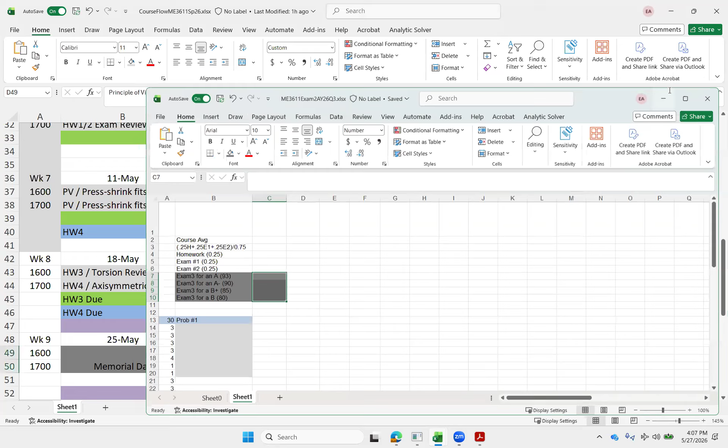Alright, let's jump on over to our 6.3 slide set. Where we left off was we had gone through and looked at all the different individual deflections from what we know about axial and beam bending. And we were able to see that they did add up to the same thing that our Castigliano method gave us. So we got pretty high confidence in that now.

We also said that if we needed to find out something that we didn't have, we could add a load on there called a dummy load. So we're just going to formalize the steps for that. For our dummy load method, we want to determine the displacement or rotation anywhere along the structure if we don't have an applied load.

Let's say we've got an end load, but for some reason I want to know the deflection and or the rotation at the middle. Maybe there's an issue where with a certain amount of deflection, we could have interference or contact with another part. We just place a load on there. Could be a force or a moment.

We can choose the direction as desired. If we're fairly clever, we can guess which way to do it so that we get a positive answer for delta and theta. But if we guess it wrong, we'll just get a negative number. It'll tell us, hey, you should have drawn it the other way. All right, so no big deal there.

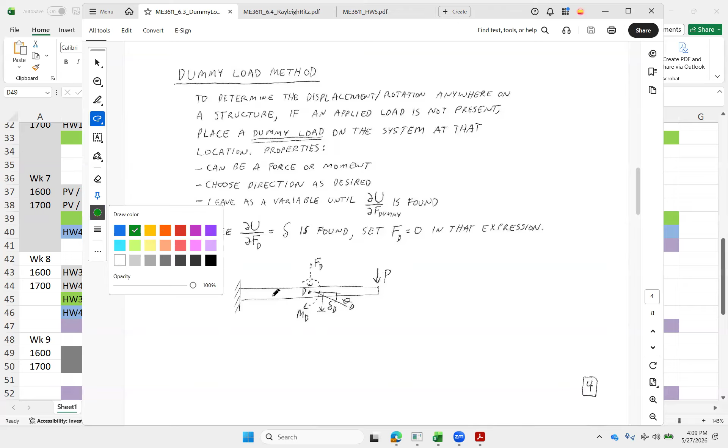We can reasonably know from our engineering intuition that this is going to deflect something like that. So if I want to know what the deflection is and the rotation, it's probably going to be going down and it's probably going to be rotating in this direction for theta and delta. So I might as well put my dummy loads on like that.

So you stick them on there, treat them just like any other load and formulate your energy. And then after we take our Castigliano, which is delta, partial energy, partial load, we'll set du d(dummy force) equals delta and du d(dummy moment) equals our theta that we're looking for. After we've done that derivative, then we go back and set the dummy load or loads to 0 in that expression. So there's our dummy load method.

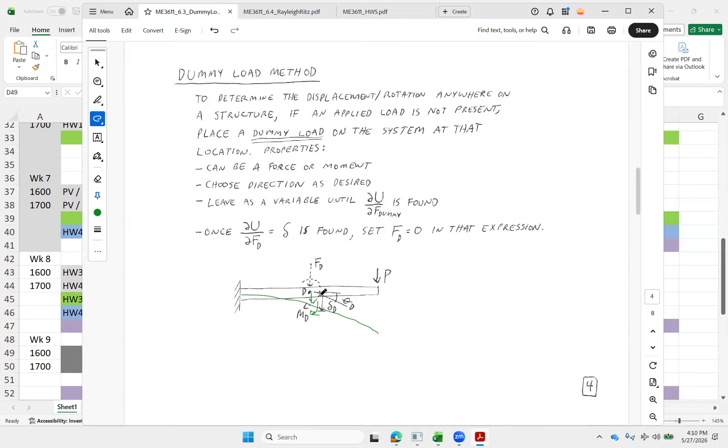All right, we treat it just like any other load, and then we zero it back out at the very end. Where the magic happens is when we get the real load and the dummy load combined in that m of x, when it squares, we FOIL it. And so even when we take derivative with this one, it'll be attached to some portion of the real load. And that's how we get our results. We were able to see those product terms come out also in this Castigliano when we were squaring for our moment in there. Let's take a look at a quick example here.

We're going to do a truss problem. So let us do one last free body review before we go to Rayleigh-Ritz method, where we won't use the free body diagram. So if you don't like free bodies, right after this will be the time to tune in. All right, let's take a look at this one. We've got a truss. It's a 3-4-5 triangle, so it's nice and easy to work with.

I labeled the nodes or the intersections B, C, D, and F, just so we avoid the Young's modulus that we're going to see in there. We've got a pin over at B. We've got a roller at point D. Dimensions are, again, make it a whole number triangle. We've got 4 on the height, 5 on the diagonal, and we've got an applied load at the top, P. Throw that applied load on there.

I'm just redrawing before we jump over. And what we'd like to find out is what's the deflection at that roller spot. All right, we know it doesn't move up or down, but it can slide over to the right. So we need a delta at spot D there. All right, we don't have a load there, so we don't have an easy energy method approach to get it, but we can throw one on there with no problem.

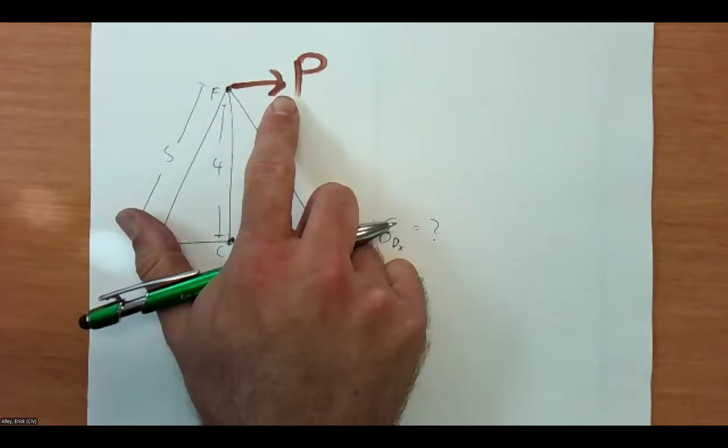So there's our applied load P. We want a deflection down here. So what I'm going to do is throw on a dummy load right here. We could call it F sub D or whatever we'd like, but some dummy load right there. And it's just going to sit right there. We're going to treat it like a load as far as the rest of the structure goes.

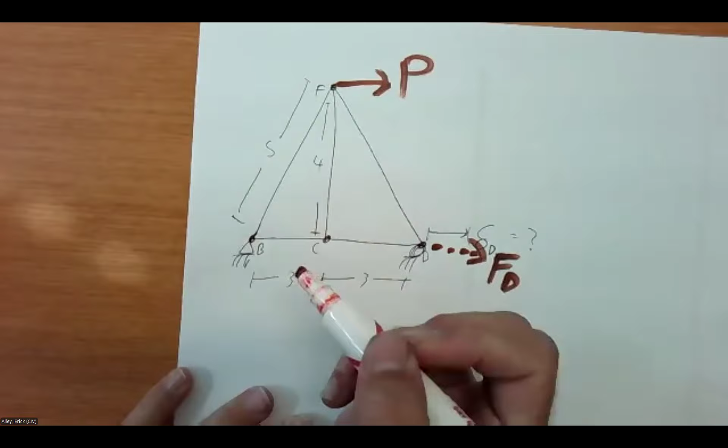All right, so now that we've got that one on there, I can figure out what my reactions are. Well, my reaction over here is the only place where I support an X force. So coming back this way, I'm going to have P plus all of that dummy force. That's the only reaction that we get in X, right?

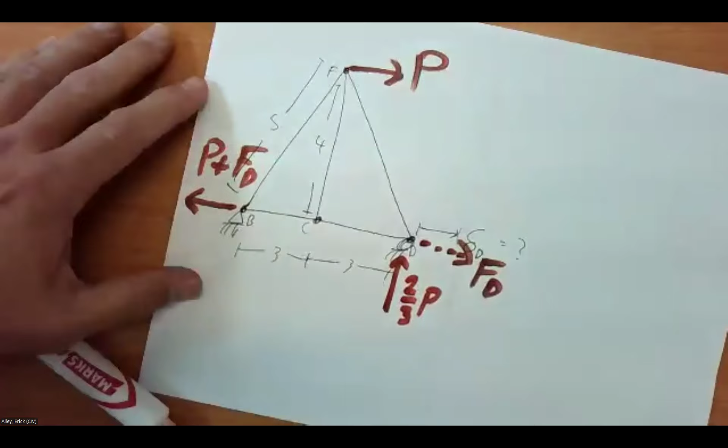If I want to grab the vertical reactions, I could do moments about B, let's say. So I've got P times 4 going clockwise, and I've got the reaction at D times 6 opposing it. All right, so what that's going to leave me with, if I do 2/3 of P here, 2/3 times 6, and then 1 times 4, those match up. All right, so if I sum moments around there, I get my reaction right there. And there's no vertical applied load. So if I'm going 2/3 P up here, then summation of forces, I just get 2/3 of P going down. So there's my reactions. There's my applied load.

Note that the dummy force didn't factor into these vertical reactions because it passes through where I was summing the moment, so we don't see that one at all. We'll only see it in the X reaction.

So here's our setup, and then we just need a few free bodies in order to grab everything that we need. We need the forces inside each bar, so let's do one free body at a time. Free body diagram at spot D first. For this, what we're going to want to do is just take a little slice around that corner.

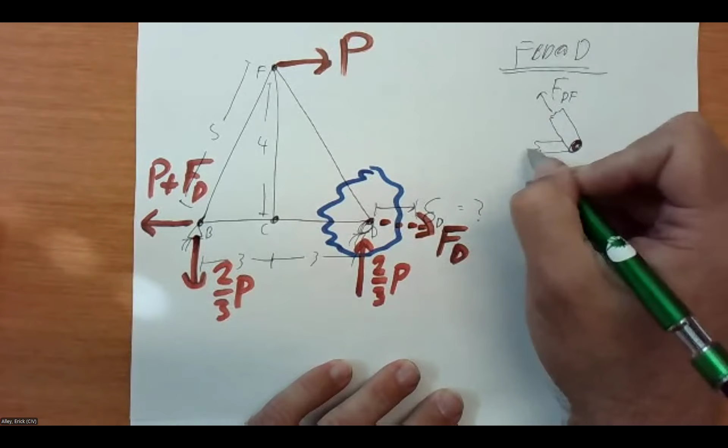At this spot, I've got the bar between D and F, so force DF going this way on an angle. I've got all of force CD going this way. I've got 2/3 of P going this way, and I've got the dummy force going this way.

Now there's two that I don't know, CD and DF. If I sum up forces in the vertical first equal to 0, I've got 2/3 of P going up, and then I've also got that DF force at 4, 3, and 5. So I've got 80% or 4/5 of it also going up. So I got the vertical part of force DF going up, and that's 80% of DF. If I take the sine, it's opposite over hypotenuse. And then I got 2/3 of P going up. So my DF force works out that they're both going up.

So that means this one will have to get a negative sign, or compression. Got minus 5/6 of that original P load. So we got that one.

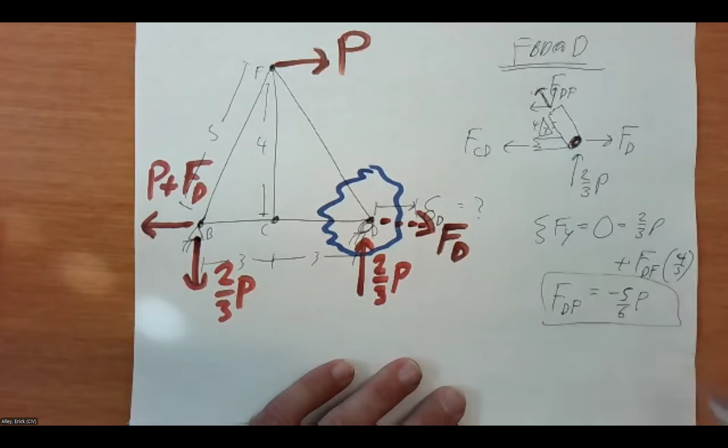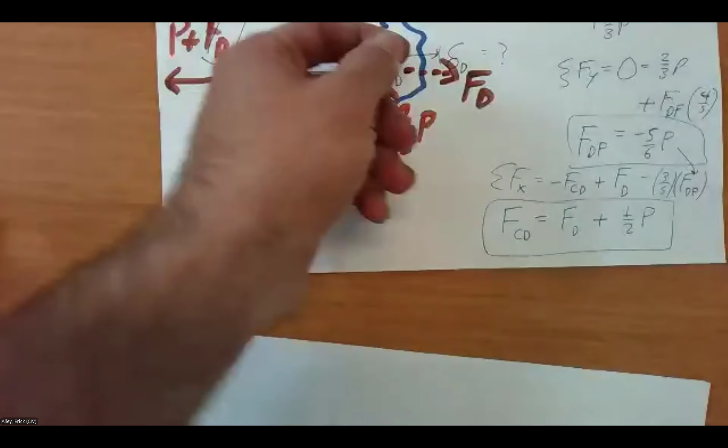So force in CD, if I crunch through on that one, I get the dummy force, all of it, plus, let's see, 5/6 and 3/5, so I get a half, 15/30, a half of P right there. So CD is in tension. We kind of figure that's the case because this should be stretching off to the right. And then this one's in compression.

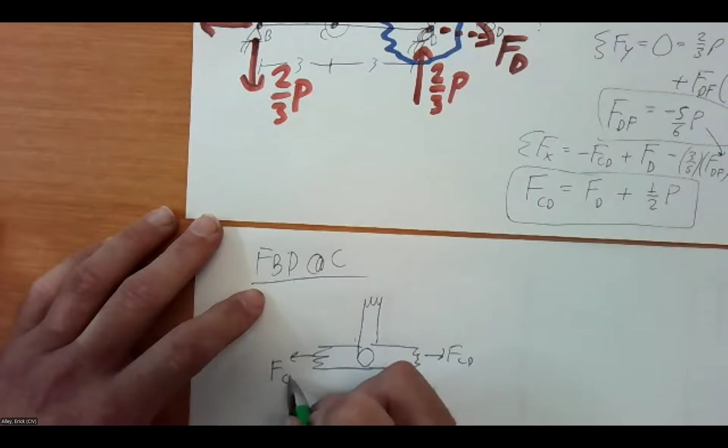If I jump over to spot C, this is going to be a nice one. We don't have to do any sines or cosines because it's all vertical. And I've got force CD, I already solved for that. I've got force BC on this side. And then I've got the force in, call that CF.

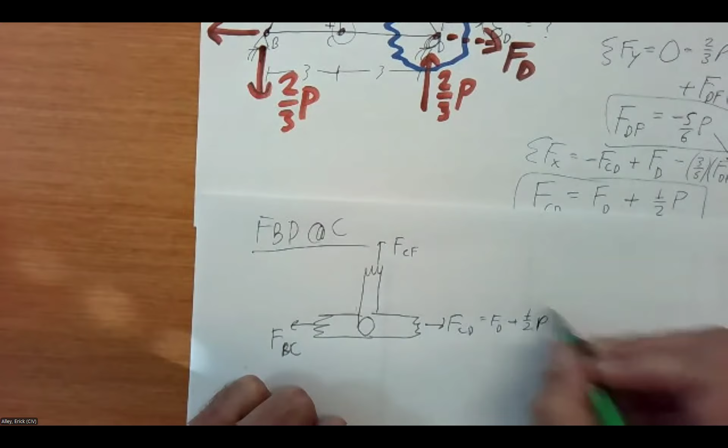This one, not too bad. I've already got force CD, so I know that's the dummy force plus a half of P. There's no other forces in the vertical, so this one's just going to have to go to 0. Sum forces in Y, and that's the only one. And then over here, they're equal and opposite in the X direction, so BC is also going to carry that same value, dummy force plus a half of P.

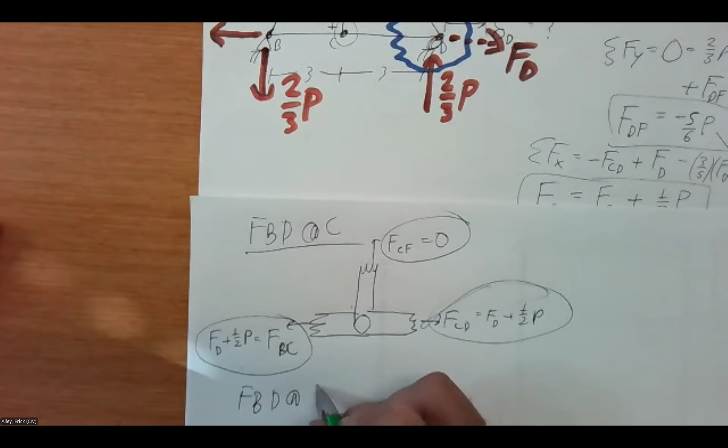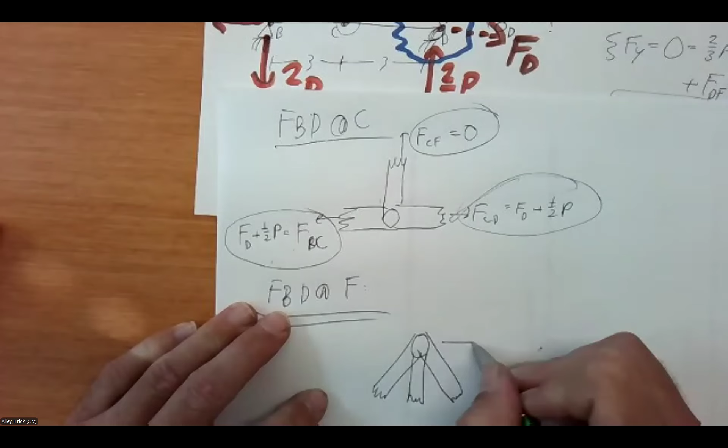So I got everything at that node, and it's up to me. I could go to any other spot. I'd like to, either the top or the left, maybe go up to the top. So at spot F, I've got 3 bars, and then I got that force P going this way.

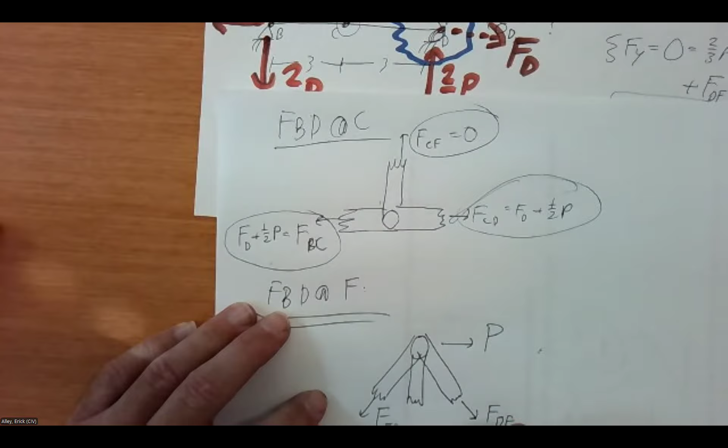Down here, I got force DF. Over here, I got the force from FB, the upper left diagonal. And then I've got force in CF, which I know is 0. Kind of falling off the screen there. There we go, thanks. So I got CF that we found was 0 from up here.

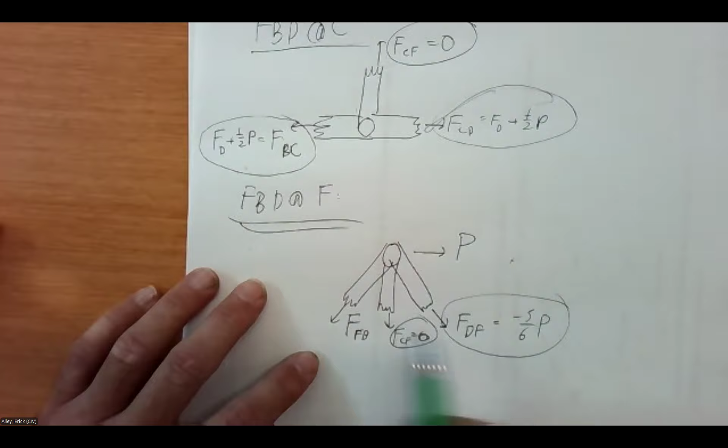DF, I got minus 5/6 of P, and I need to get this one right here. If I sum in horizontal, I've also got to include that P there. But if I sum in vertical, all I've really got is the same component both going down for DF and FB.

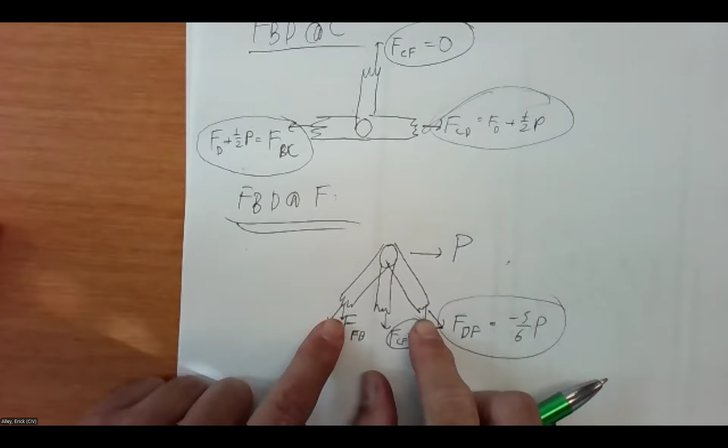They both have that 80% of it going down and both in the same direction. Then all I do is flip the sign between these two. This one's going to go plus 5/6 of P.

So now I got the loads on all 5 of those members. Do they make sense? Well, what it's just telling me is that by pulling over to the right, I'm pretty sure I'm going to stretch this one to the right. So that makes sense.

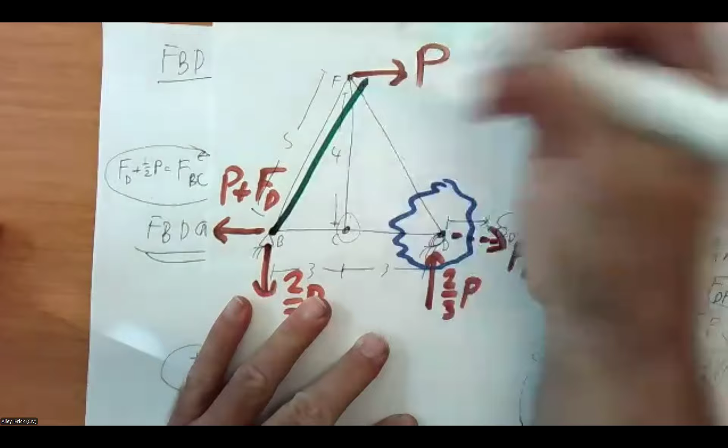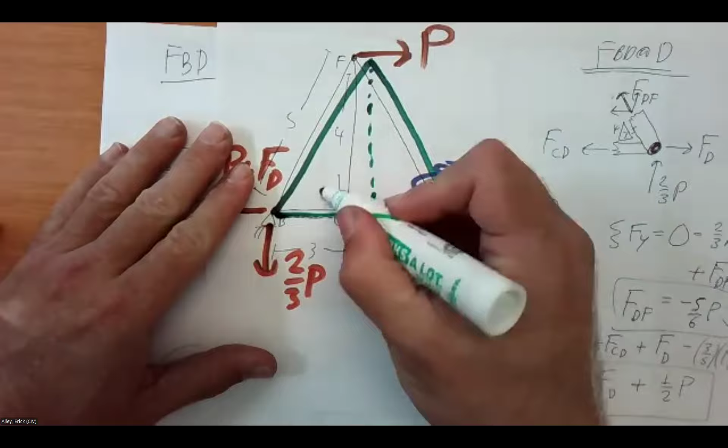This one's going to get a little bit shorter, that's probably what's going to happen. It's going to tip over a little bit like that. This one's not going to carry any load, and these two are going to stretch out. So I've got tension here, tension here, tension here, and compression here. Nothing on now, that looks about right.

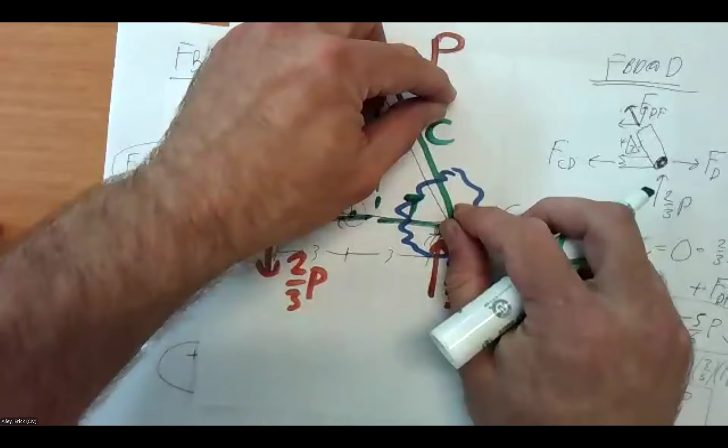My triangle is going to skew over, so I expect this part to stretch as I pull it to the right. This one will contract a little bit, and then these will get pulled out. If I didn't have the bottom ones, this would slide off to the right, so they should definitely be in tension.

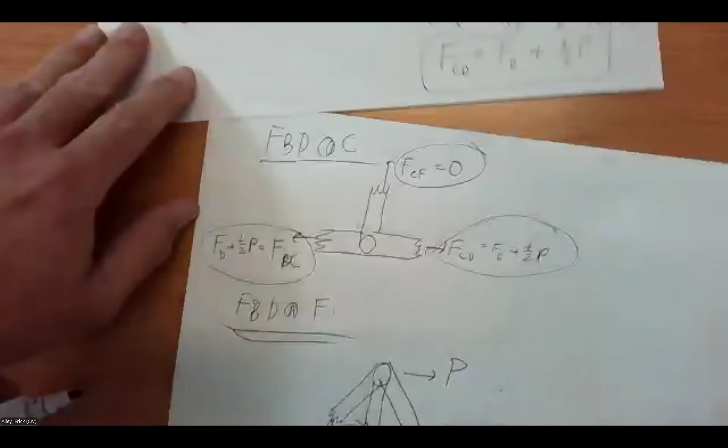So now we've got all the loads on there. It's just up to us to make the energy expression, which isn't going to be too bad for us. So U is just going to be the summation of U for the bars that we have. And for our bars, that's going to be F squared times length over 2AE. We'll assume all the bars are the same, so we just need to go one by one.

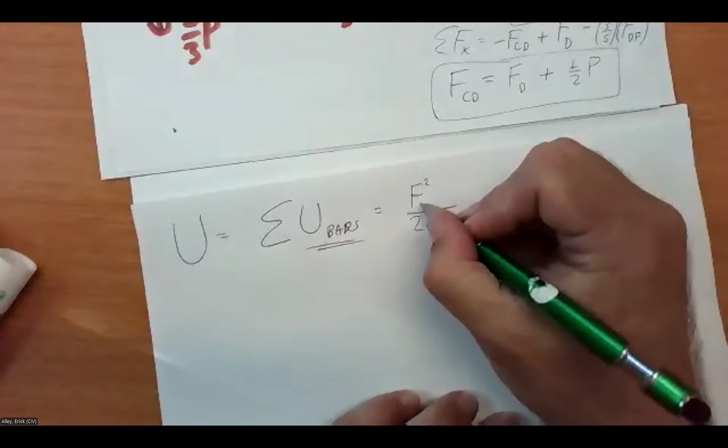There's going to be force in DF squared, and that DF member has a length of 5. So F squared, this is the length of DF. We've got F squared, then we've got force in CF, square that one, we've got a length of 4. All these are going to look exactly the same.

Force of FB squared, that one had a length of 5 over 2AE. We've got the force in BC squared, that's a bottom one, so it's a length of 3. And then we've got the force in CD, did put that one on, squared, 3.

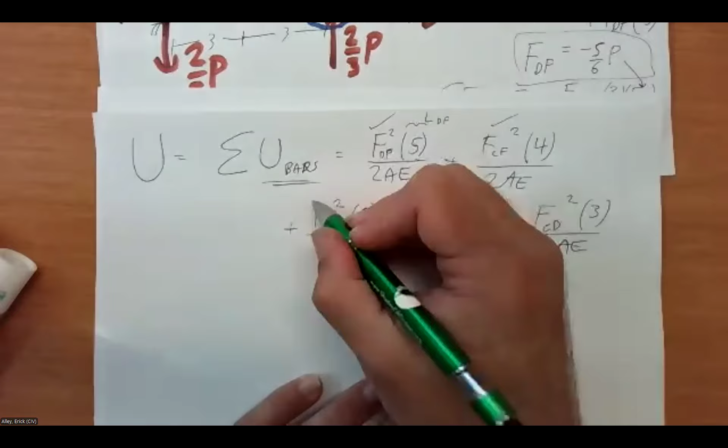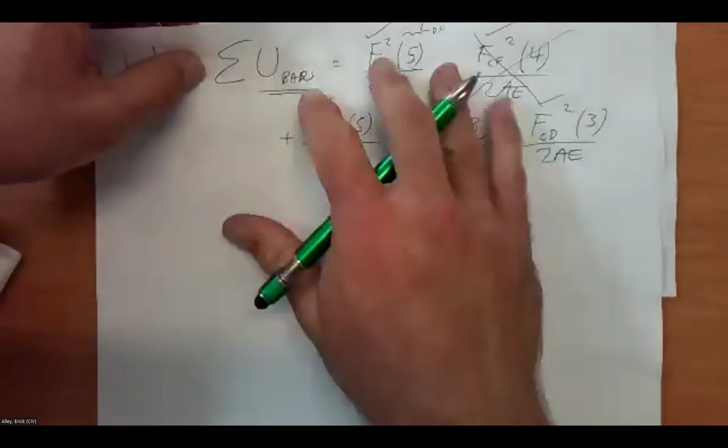So we don't have to do any integration. There's a little bit of foiling, but it's not too bad. So I'll just skip ahead to our full value here for U, I'll save us the foiling part. We get 250 over 72AE with the regular load squared. We get 3 times the dummy load squared over AE. Then we get another 3 of the real load times the dummy load, that's from the middle of those FOIL terms, the OI terms.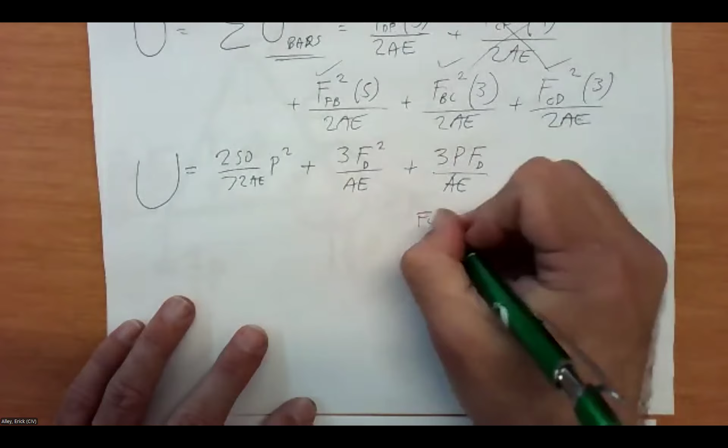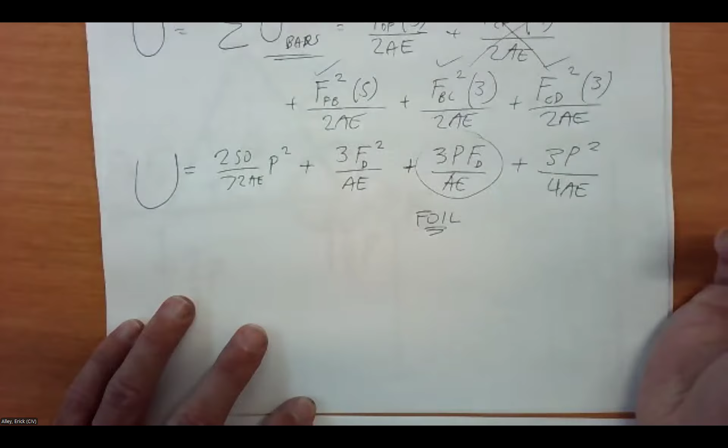This is the term that links the real load and the dummy load, and that's what's going to leave us something left on our derivative. And then we got the real load term. Something like that, for all the stuff once we combine everything.

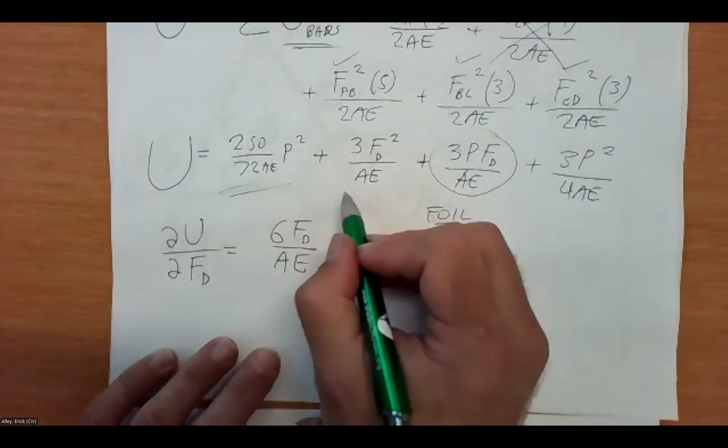So we've got to take a partial U, partial dummy force. This is what's going to give us what we need. This doesn't have anything with the dummy load in here. This one does, so I'm going to get 6 times the dummy force over AE here. This one's all P, and then this one here, P times dummy.

Here's the middle of that FOIL term, this is what's really going to help us. So I'm going to get that one, I'm going to get 3 times P over A times E. And now I've got my expression for delta at D in that direction we want to go.

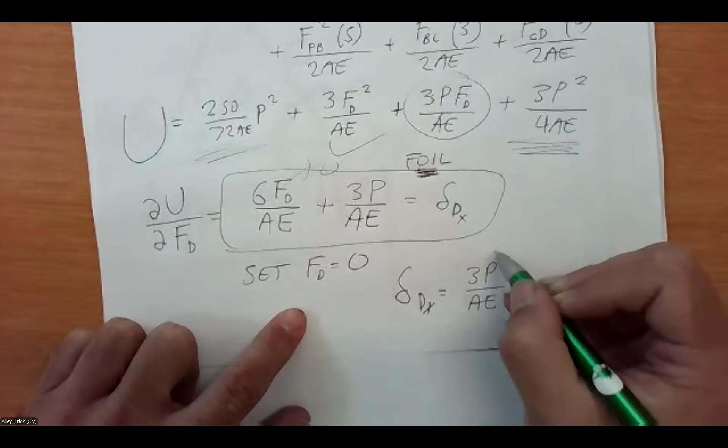Then we're going to set the dummy force equal to 0. Now is when we can plug back in 0 here, so we can zero this off. And we see the term that survived was that OI from the FOIL. So my delta, I can say, is 3P over AE, and there's my deflection. Seemed to work out okay.

Now it would be great if we had some idea of that deflection from another formula. So let's think about the force that's inside this BCD member right here. The force in CD and also the force in BC is this, dummy force plus half a P. So the force that's inside BC and the force in CD, in terms of real load, is half a P. If we didn't have the dummy load on there, I know that these are getting stretched by half of P in tension. And I know my delta for axial is force times length over A times E.

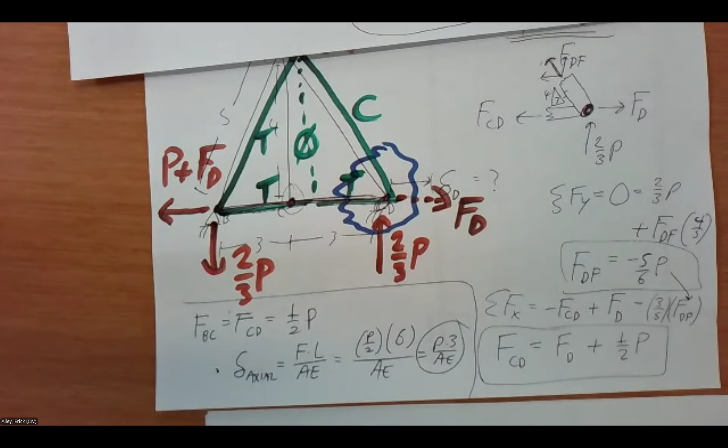All right, let's jump back to the slides, and we'll lead on into our Ritz method next.

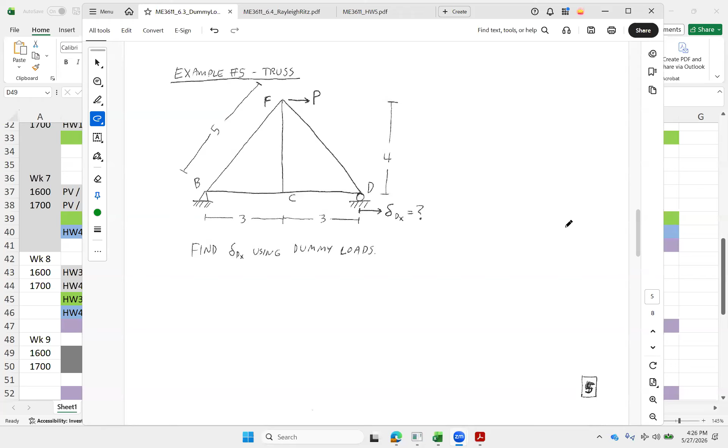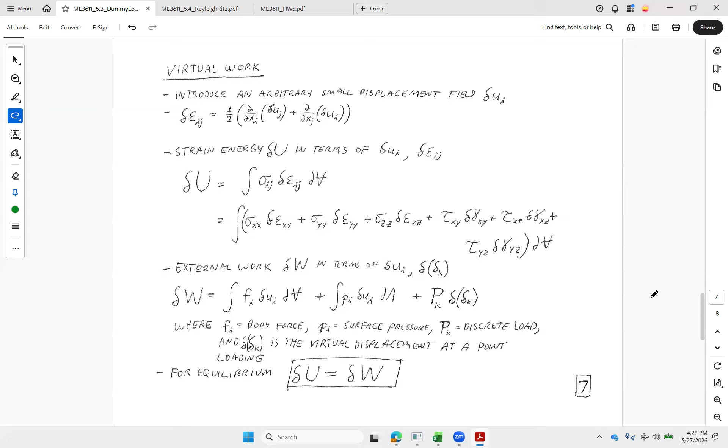And for equilibrium, we should say that this internal energy matches the external work. Goes back to our physics class where we said change in kinetic plus change in potential plus change in work equals zero. Conservation of energy is all we're doing here. That says however much external work I stretch out the thing, it's going to be stored internally as some potential or strain energy from all the atoms getting stretched apart like a spring.

And what we're going to say is we're going to take a term called potential. It's going to be the difference in the strain energy and the external work. Now, ideally, this should be equal to zero if those two are equal. So for virtual work, you just put that lowercase delta on it to be formal. Delta potential is delta strain energy minus delta work, or we could factor that piece out. And for equilibrium, these two are supposed to be equal. So we're going to say that this delta pi should be equal to zero if we have an exact solution.

So if we think about it maybe for something like a point load, we'd say delta of U minus force times displacement. Force times that virtual displacement right there, that'll pass through to that. And what we get left with is force is derivative of U with displacement, which is our other Castigliano theorem. We talked about too. We said we could do d energy, d displacement to get force, or we could do d energy, d force to get displacement. We see the other one showing up right there.

Now, where this is leading up to is our Rayleigh-Ritz method. And this time we're looking for a solution, could be exact or could be an approximate solution, to give us a displacement field for beams or torsion or any other kind of members. Usually for beams because they tend to have the most complex shape.

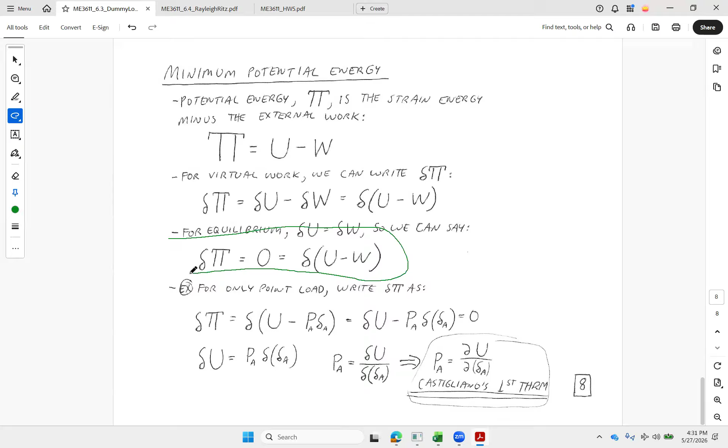So back here in the virtual work formulation, we said if it worked out exactly and we picked an exact answer, this potential should come out to zero. What we're going to try with the approximate methods is to minimize this number. Instead of zero, if we can't quite make it zero with an approximate answer, we'll make it as small as we can.

That's why we went through the trouble of making this little expression up. So for example, maybe let's say we've got a simply supported beam and a bunch of complex loads on it. Some distributed forces and point loads and a lot of stuff. So I've got a distributed load across here, and maybe it's a wavy load like that.

And if I went the integration approach and tried to do this, I'd get an expression, but it's going to be kind of complex. I'm pretty sure that it's going to sag down, and maybe it'll have some asymmetry to it. But for any kind of loads that are pointing down, whether I've got this plus some intermediate forces and who knows what else on there, I could reasonably assume that I've got this, and maybe I've got an end moment right here and another bigger force right there.

If I think in general, it's going to sag down like this. So I could pick a sinusoidal type function, maybe one or more terms. And if I set it to where I get sine of pi at the right end, so some pi over L times a multiplier, then it'll zero out displacement on the right, and sine of zero is zero, so it zeros out displacement on the left.

So just one term, half of a sine period, would be a decent approximation for a beam like this. I'm pretty sure it's going to sag down in the middle. I might not get the exact answer, but I'm going to get something in a good ballpark.

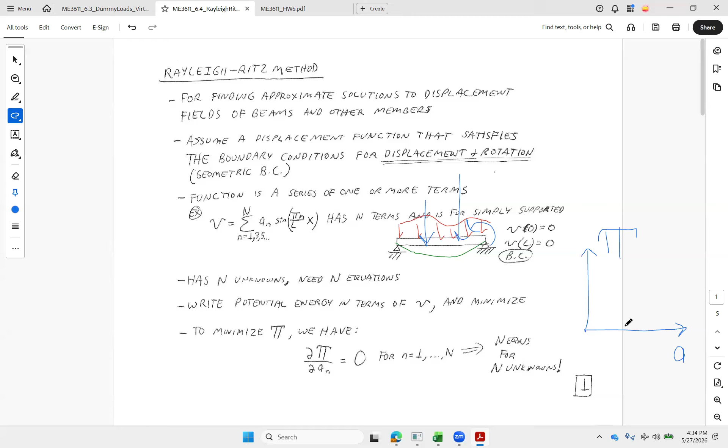It's going to go something like, say, this. We're trying to find the value of A that gives me the smallest amount of error here, usually at some sort of a local minimum. So I'm looking for when the slope of this function with A is 0. And that's going to be what we need.

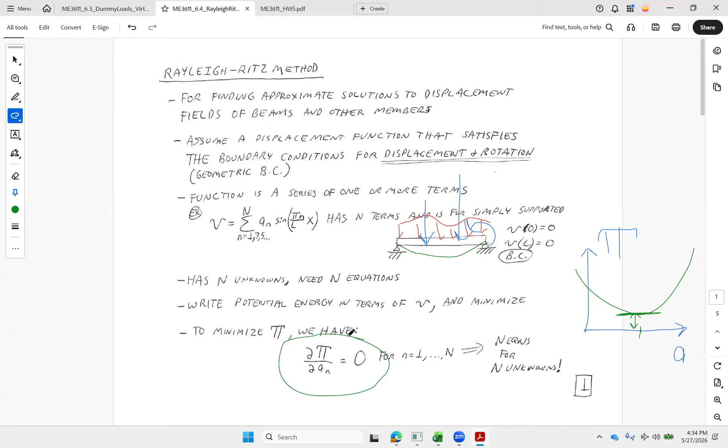So let's give this a try, we'll see how it works. We're going to try a couple different methods. We're going to do a polynomial function, which I know I can get the exact answer for. And if it works for that, then we'll try it with a trig series instead.

So we've done this one, we beat it to death. We know what the deflection on the end should be already, right? I know that V at L should come out at PL cubed over 3EI. It's on the 3.5 slide set, we've integrated up to it, et cetera, et cetera. So PL cubed over 3EI, that's what we expect to get. 1/3 of all those numbers, PL cubed over EI.

So let's try out this Rayleigh-Ritz approach, but try it out with our polynomial, so we know we're going to get an exact solution. Then we'll try it with something approximate like the trig series. So let's jump over here and we'll give that a go.

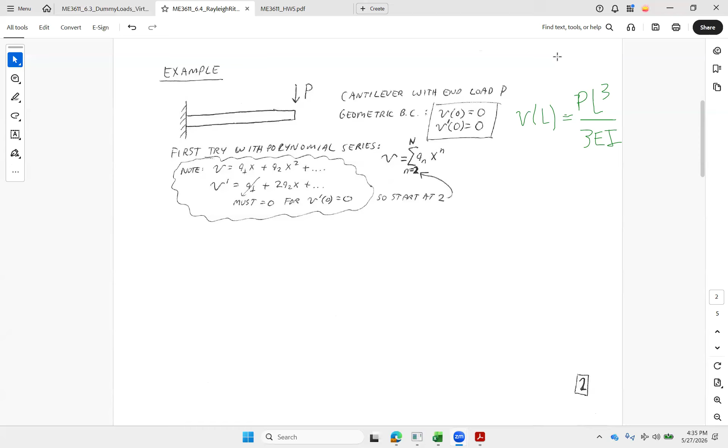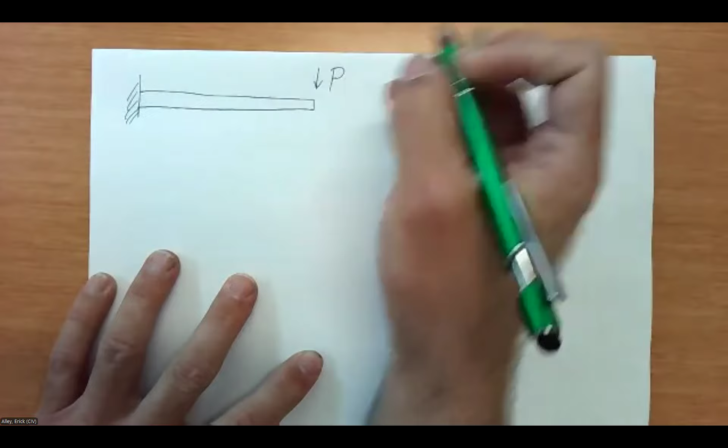All right, so if we're going to set it up as a polynomial, here we've got our cantilever beam. I got P on the end there. And then my V of X function, let's just say we make it some summation of A sub I times X to the I. So that's a good polynomial. It's going to be like A naught X to the 0, so that'll be the constant, A1 X to the 1 plus A2 X squared plus A3 X cubed plus dot, dot, dot.

Now, when I'm picking this function, I've got to satisfy my boundary conditions for geometry. What are the, if I put X here on the left, what's my two geometry boundary conditions here? That is, where do I know the slope and or the displacement?

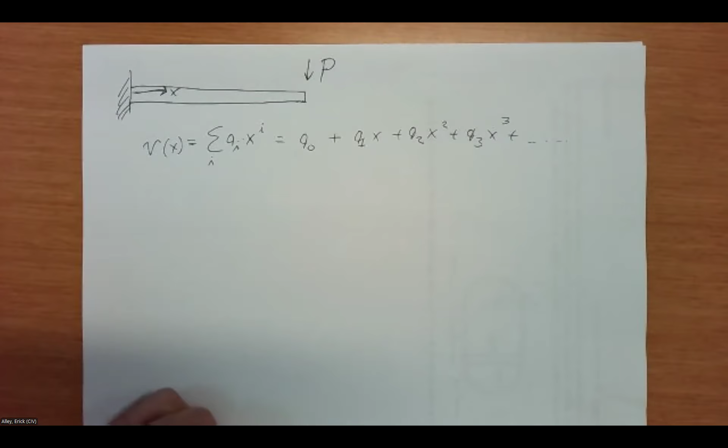Right, so over here at this end, I know that V at 0 is 0. I also know that from this fixed end that the slope at 0 has to be 0.

So let's write out the V prime of X expression - that one doesn't come down. I got A1, plus 2 A2 X to the first, plus 3 A3 X squared, plus any other term. Now, for V of 0 to be 0, I definitely can't have this term, right? Everything else in here would zero out, so these are all good to satisfy this one. I can't have that first one, though, so we'll make sure not to use that.

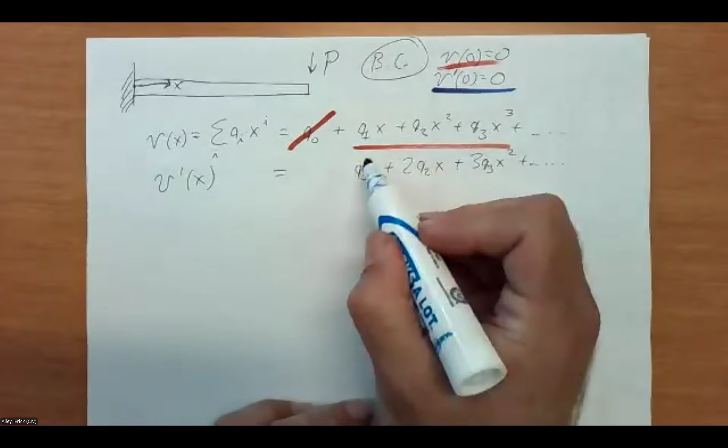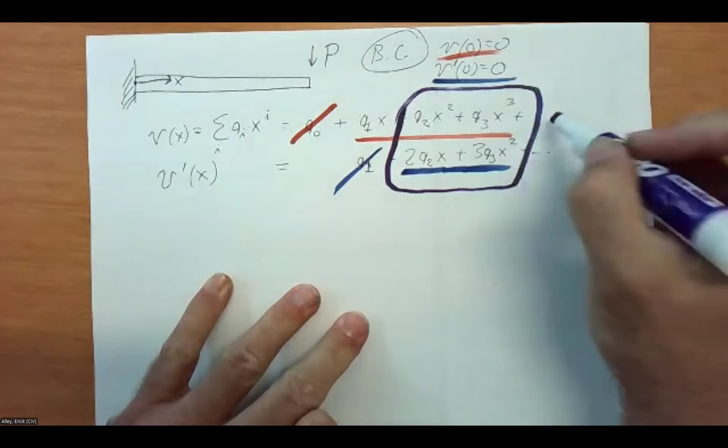For the slope equal to 0, that's these. I can't have this one either - this would zero out at 0. This would zero out, so these are okay. So the two of those together, red and blue - or purple - satisfy both of those conditions, these terms and any higher order ones. So I can't have a constant in there. I can't have an X to the first because that won't give me what I need for the slope boundary condition. So I need to pick these.

And if we look back on the slide deck, we just pointed out PL cubed over 3EI. We kind of already know V at the end, PL cubed over 3EI - I can see it's got a cubic in it, so we probably don't need to go past the third order. So let's try it out with this as our function.

So V of X we're going to say some constant a2 x squared plus a3 x cubed. And that means my v prime of x is going to be 2a2 x to the first plus 3a3 x squared. So here's what we've got.

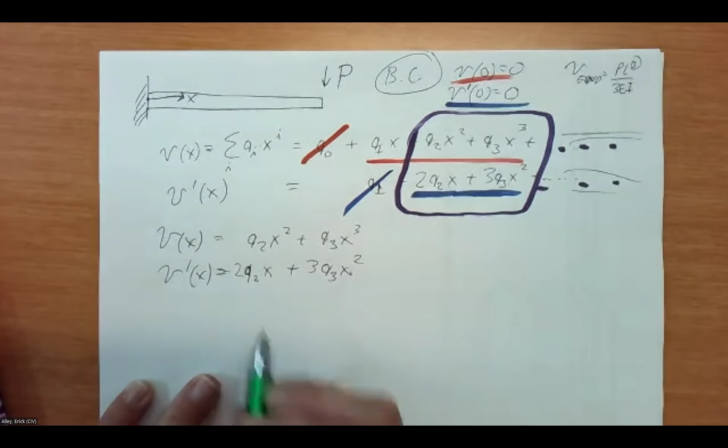We're going to try this out for our Ritz approximation for that displacement.

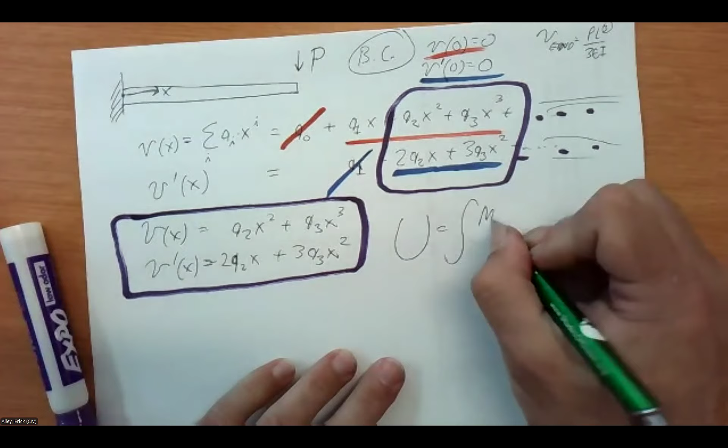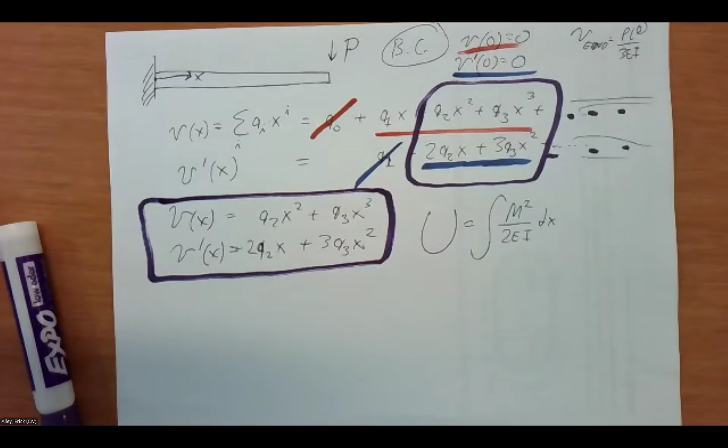Now, before we've been factoring energy as integral m squared over 2EI, dx, right? And we had an m of x. With the Ritz method, the whole idea is we don't want to have to bother with our free bodies or m of x or anything like that. So what we've just done is we've assumed a deflection shape. We know it's going to go something like that. We can do that with a polynomial, no problem.

So v and y are down this way. But remember, EI v double prime is equal to moment. So we can make a substitution in there, and we could also say that we're going to have EI over 2 and then v double prime squared. That also works for us. Looks like we're going to need one more derivative for that.

So if I come down there, I'm going to get 2a2 plus 6a3 times x. This second derivative is what I need to formulate the energy in terms of this function that we've assumed. And it's only got two terms, so it's not terribly bad to work with.

So that sets us up there to get u. Our work term is just going to be right here - I've got v at L. That's how far my load went, and there's my force. So my work term is just going to be the load P applied times V at L. And I've got an expression for V of X - I just plug in L, and it goes here. So I've got this, and then I got this. A little bit messy, but I've got it there.

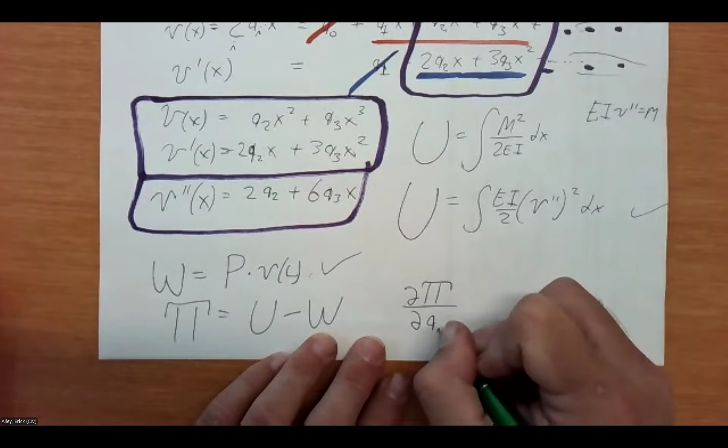So there's the expression that we had to work with. Our Ritz method says pi is U minus W, and then what we're trying to get is d pi d a sub I equal to 0. We're going to have two constants in there, so we do need to solve for both of those.

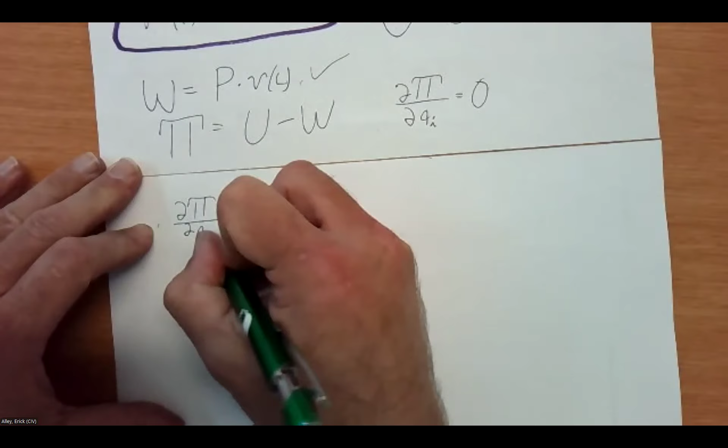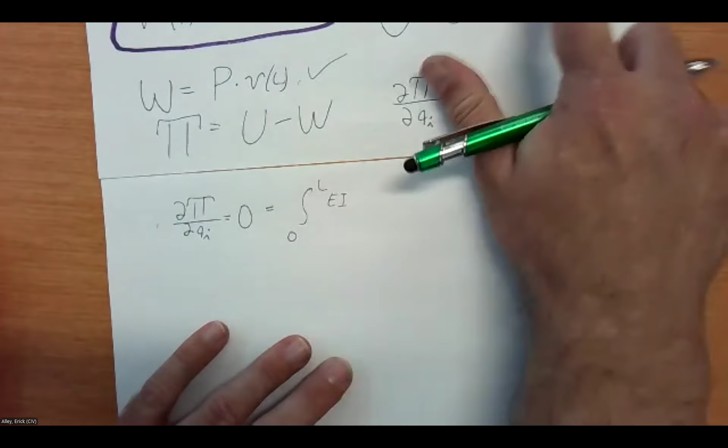So in terms of how this will look, my d pi partial a sub I equal to 0. Well, I could do the u part first. It's going to be from 0 to L. I've still got the EI out there in front - this is v double prime squared, that's a function of A. So I could take the 2 down, say v double prime to the first, times partial v double prime partial a sub I - might make it a little bit shorter expression for us. And then for the minus the work term, partial W partial a sub I.

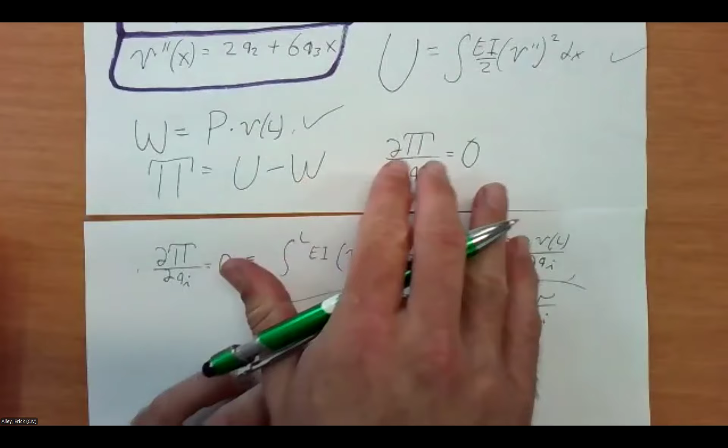So it's going to be P here, and then partial of V at L with A sub I. Here's the partial U, partial A sub I, and here's the partial W, partial A sub I. And it doesn't matter what order we go in. We could write out this expression and this expression first, and then take the derivatives, whichever way we want to go.

I'm going to skip just a little bit of that stuff and save us the algebra. So d pi dA2, that's the first one. That one equal to 0.

And what we're going to get for that one is 2EI, 2a2L plus 3a3L squared. And then over here we got minus PL squared. So there's our first expression that we have to work with.

It's got A2 and A3 in it. Two unknowns, one equation. The other equation that we have is partial pi partial A3 also equal to 0.

So we can make that other expression as well, right? In that one, we've got a 6EI out in front. And then we've got A2L squared plus 2A3L cubed. And then from the work term, we're going to get a PL to the third.

So I got two equations and then two things that I don't know, A2 and A3. So out of that, if I combine those two, I can solve that A2 is going to come out PL over 2EI, and A3 is going to come out minus P over 6EI.

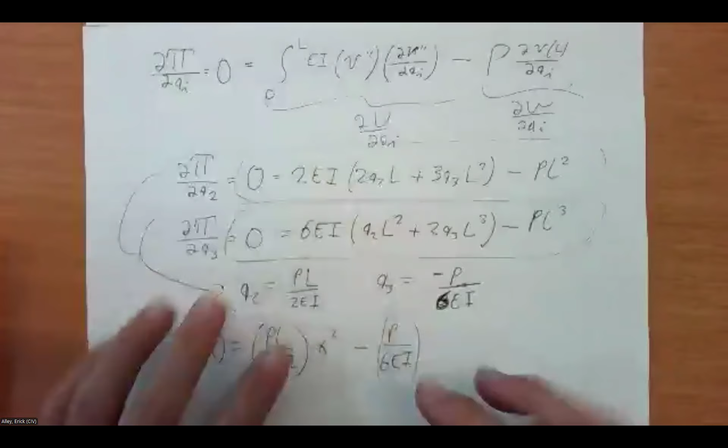So this goes back to the purple box. There's my expression for V of X. If I plug it in at L, I get a half minus a sixth. That's going to be PL cubed over 3EI. So it works out like we thought it would.

Now we can see with a polynomial, I've got to deal with another FOIL type setup where I got to take a derivative and multiply them together. And then I got to take two derivatives, one with the first constant, one with the second constant. So once we have more than one term, the utility really starts to go down for us. Ideally, we'd like some kind of a single term, like a sinusoidal type shape, where we don't have to deal with a lot of foiling, and we could quickly get to a result. It may not be exact, but it'll be pretty good.

So let's try this once more, but with a trig type approximation. So we came up with a pretty nice number for that one. Now our trig approach, jump back on here.

A sinusoidal type curve will get us zero displacement, right? But it won't get us zero slope, right? So if we're thinking about some basic shapes, and remember we've got V going down, right? But I'm going to, just for the sake of looking at a sine curve, all right? A sinusoidal curve, I could go something like this. That has zero displacement, but it doesn't have zero slope, right?

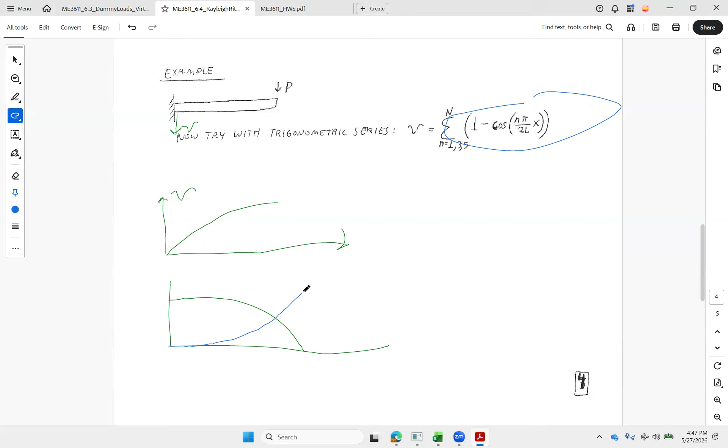That's going to give me my maximum displacement and slope for V going this way. So if I were to plot that right here, it would look just like this, right? With a zero slope, zero displacement, and I'm just going to start down now. Zero slope, zero displacement to start, and then continually curving more slope and displacement. So 1 minus cosine is a nice setup, and we just probably do one of those, all right?

And we'll see how good can we make that one. So my V of X this time, 1 minus cosine, and we're going to do pi over 2L and then times X, right? And since we got a constant in there, that'll fall off for the derivative. So we won't see that too much. It won't really cause us any foiling problems.

So here's my V of X. Gives me the approximate shape that I want. It's going to go like this for a V pointed down, and X over this way. So V prime, the 1's going to fall away.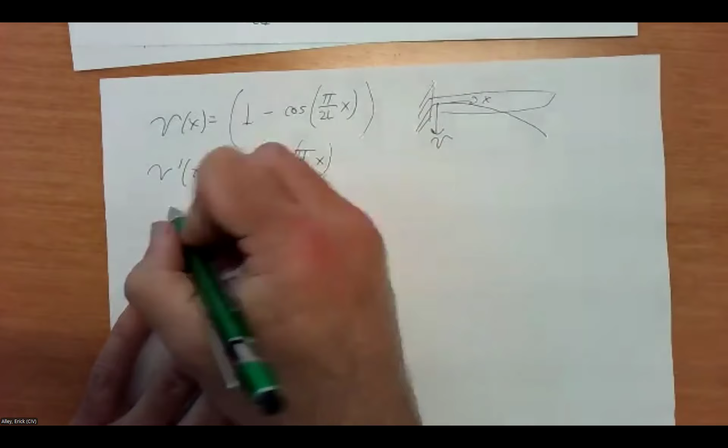All right, so I got minus cosine. That flips the sign, so I got sine of pi over 2L times x, and then I need the derivative of what's inside, so that's going to be a pi over 2L out here. And then I go down one more time. Derivative of sine takes us to positive cosine, so I get cosine pi over 2L x, and another one of these comes out, so I got pi over 2L squared.

All right, everybody buy that okay? Or agrees with my trig derivative? I'm doing that one on the fly.

All right, so of importance, my V double prime is now a single term. That's going to make it pretty easy to plug back in when we go to our expression. So U we had as the integral...

EI over 2, and then V double prime squared dx from 0 to L. So if we bring the stuff out, we got EI over 2 out front. This stuff can come out. It's actually going to be fourth order now because I got V double prime squared, so I got pi over 2L to the fourth out there. And then on the inside, I got cosine squared from 0 to L, pi over 2L times x dx.

All right, looks a little bit imposing, but if we just go to the back of the calculus book, this one will spit out at L over 2. Okay, not bad at all.

So I could throw that one in there. And then my total expression for U is going to come, and don't forget we need an A in front of there. So let me throw that in front, make sure we didn't forget it. We do need some constant for the magnitude, so that means we're going to be left with A squared out here.

All right, so it's going to be the load P and then V at L. V at L, if I evaluate this, this one goes away at L, and I just get times A. So it's going to be P times A, and there's my work.

All right, so I got pi equals U minus W, and then I just need to do a d pi/dA equal to 0. We only have one variable, so we just have to do this once. All right, so here's right here, I'll get pi to the fourth over 32L cubed.

And then I've got A to the first power out there, and then I got minus P right here. So here's my expression that I have to work with. And I could see that A is just going to equal 32PL cubed over pi to the fourth EI.

All right, remember, before we had PL cubed over 3EI as our exact solution. All right, if I take a look at this 32 over pi to the fourth, that comes out at 0.329.

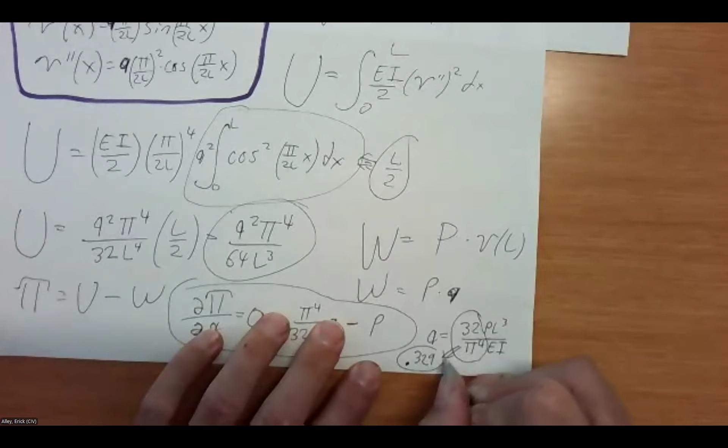My last sheet there, so I'm going to go off the page. 32 over pi to the fourth, if we crunch through those numbers, we get 329 versus 333. That's really, really close. And this was certainly a much faster setup for you.

V double prime had just one term. The derivative went really fast. No foiling. And we only had to take one derivative instead of two, and then two equation, two unknown for polynomial. So I can see I'm not going to be perfect, but I'm going to get really, really close with one of these Ritz approximations to what we're expecting. And best of all, I didn't have to do any free body diagram, right? No working to get M of X and foiling out M of X and all that stuff.

All right, so there's our solution, and we see it works out pretty well. Did anybody have any questions about that one?

All right, let's jump on back here.

So there's our Rayleigh-Ritz method. We've got a summary slide at the end of those energy ones. It's going to be 7.4, so we can kind of summarize out what we've looked at so far.

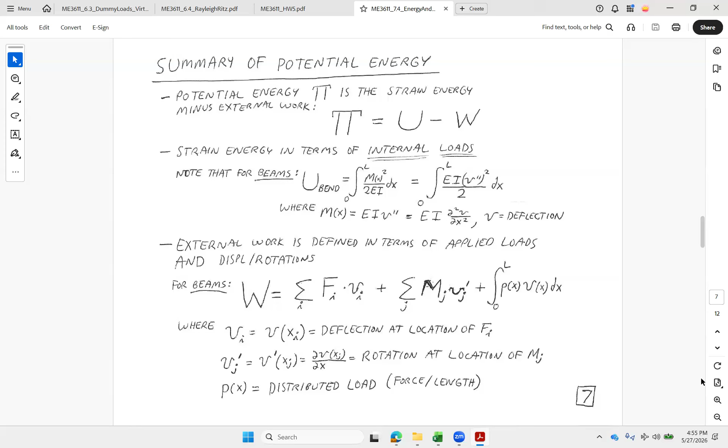And here's all of our definitions there. So in our Ritz method, once we formulate that, we can take our d pi dA, set it to 0, and solve for what we need.

We just saw that this cosine squared for a quarter period works out to L over 2. That's also true if we're using a simply supported beam and we're going 0 to L as 0 to pi. Sine squared from 0 to pi is going to work out at L over 2 also.

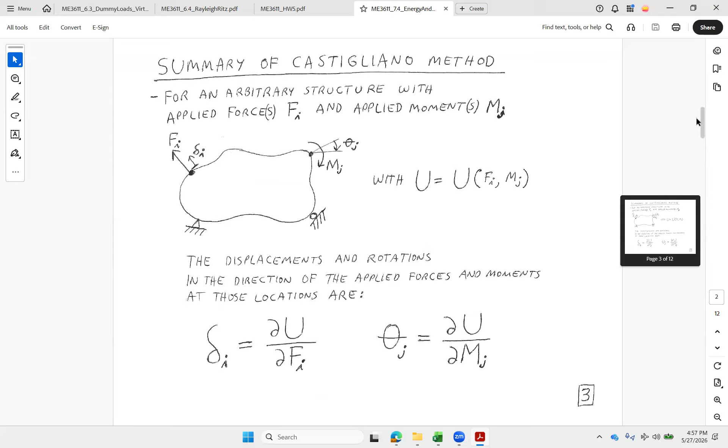All right, rest of the stuff in here, we've got some thermal expansion stuff. That's what we're going to get to at the end of the course. Also in here, we got our dummy load method formalized. We've got all the Castigliano stuff, strain energy for specific cases.

And then our full-on formulas. Remember, our special cases, everything with the moment can usually be used with one of these constant load setups. This is the only one - be careful, usually have to integrate M squared dx. And then if we have any multi-component structures, we could just add those up.

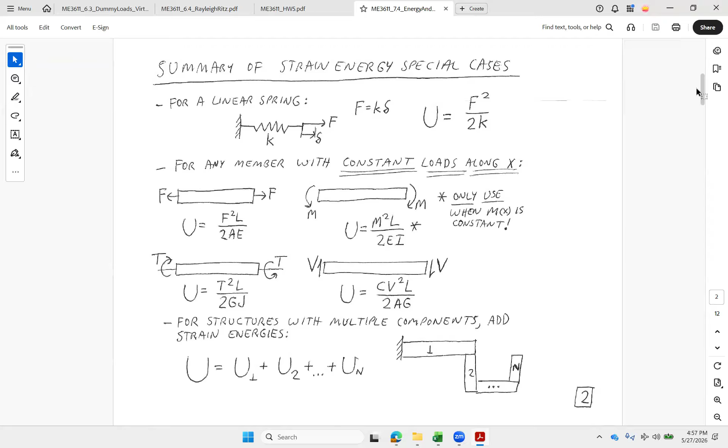Let's go ahead and take a look at the homework 5 problems that we can do. And then at this point, we'll be all finished up for today. We'll probably finish up pretty early today. We'll save that thermal expansion stuff for next Monday. All right, and that'll be our last new set of material.

So let's take a look at our homework set, last one. We're launching a UUV out of the mission bay on the LCS, and we're using this crane rail at the back. We've got some hydrodynamic drag, so our load tension on the line is going to be at this 3, 4, 5 triangle - back this way, whatever it is, 36.9 degrees, but easy sines and cosines.

And here's our section right there. I went ahead and did A and I and all those things for you right there, and we've got our correction factor for including shear as well. So here's all of our stuff to plug in once we have the formula.

We want to find the horizontal and the vertical deflections of the end of the beam, right? Using our Castigliano, we want to know those component displacements. We've got a load that's on an angle, so all we really need to do is break this into two pieces.

And we can treat them as individual loads, all right. I can have a piece of Y here - that's going to be my 800 pounds - and then I've got a piece of X. So if I break that into two pieces, which is fine because I do have those two components, my d energy dpx is going to give me my axial displacement, and my d energy dpy is going to give me my transverse or vertical deflection.

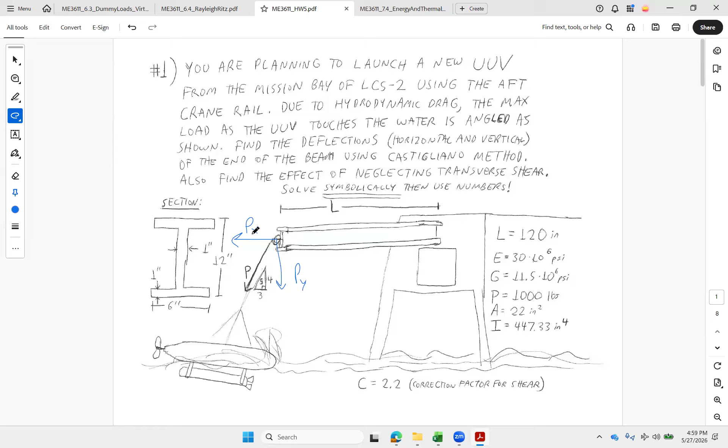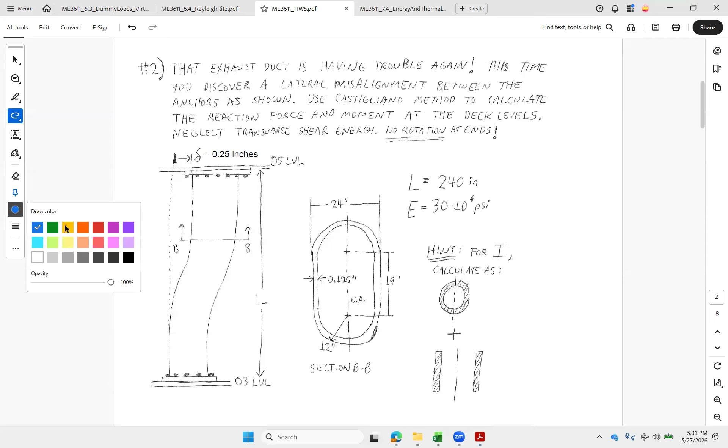I'll put a reaction up here. I'm almost sure it's pushing that way. And because I'm frowny-faced right here, smiley over here—or whichever way you're looking at it from—I'm pretty sure my moment is going to have to go like this, because I can see the curvature going that way.

So I put two loads on here, or I can put them down here, whichever way I want to do it—but let's say up there. If I go through and get the energy in terms of these two, I can call this reaction force, reaction moment. Then I take the energy derivative with respect to the reaction force, that's equal to delta. But this time I know my delta—it's 1/4 inch. So du/d-force is going to give me 1/4 inch.

This time I need to solve for the load instead, and my du/d-moment is going to give me my rotation. What's my rotation up there, if it's a fixed end? Zero, right—the bolts have got it held, it can't rotate. So I can take du/dm equals 0, du/df equals 1/4, and then solve for these two reactions, what we don't know.

This gives us a chance to try statically indeterminate with our Castigliano. It can go a little quicker than the integration of the beam method, and maybe the same or a little slower than superposition, but we have it for two variables this time. So you get a statically determinate Castigliano on the first one, and then a statically indeterminate here.

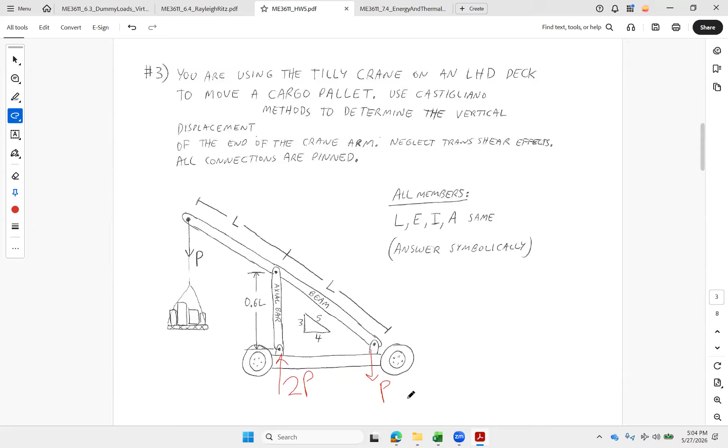From that spot, I'm going to make a couple of cuts. I'll keep this one and treat it as a beam from 0 to L. I can make a cut down here and keep this piece, and then the axial bar—take a cut, keep that right there. So the axial bar will be constant with 2P going compressive. This one is going to have, just like problem number 1, 80% of P going transverse and 60% going axial, compressing this one and stretching this one.

We just leave it all as a function of P. For this one, though, get your energies—get an axial and a bending energy for this piece and this piece. Even though this one's compressing and this one's stretching, they'll still come out the same energy, so we'll get double of that. Then we'll get the energy in the axial bar, and taking the derivative of energy with respect to P will get us the deflection.

Then for number 4, we've got a cargo pallet here. It's resting on a couple of rollers. We put it off the crane, and we've got a load that's evenly distributed on the right-hand side of the pallet. We'll do a one-term Ritz approximation.

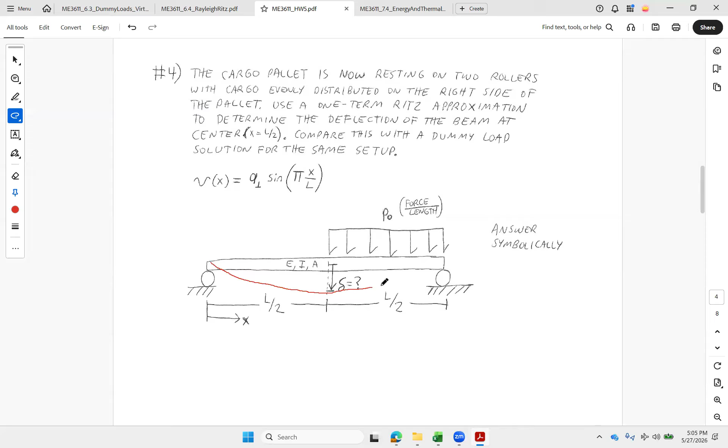We want to figure out what is the deflection right here at the center. That's going to be just equal to A1, because for a single term, the max deflection goes right through the center. With the Ritz method, my actual deflection might be just slightly skewed of that, maybe looking something like this because the load is over there. But we're going to get a pretty good number.

So try out the one-term Ritz with your distributed load right here. It's going to be a distributed load, but you're just integrating sine up to cosine, or you can have a calculator do it for you, but it's a simple expression. Then figure out what delta at the center is. It should be equal to whatever you found for A1.

Then go back and try it with a dummy load, which is going to be, we'll put a dummy force right there and solve it with the M squared approach. That one will take us a little bit longer, but we'll see that these two methods will come out really, really close for that deflection.

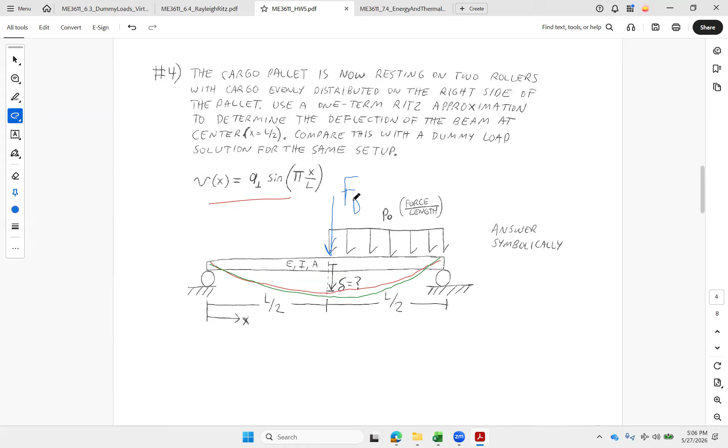And then our last one from what we've already covered, number 5 here. We're at this access hatch, trying to get it open with a lug wrench. We want to figure out, when we're pulling down with a certain amount of force over here, what's the deflection over there, as well as the rotation as we're pulling down.

We're going to watch bending and torsion effects. We don't need to include the shear energy. But that means for this beam right here, I'm going to have a force and a moment on it, so I'll have bending all along this one. When I get over here, my bending moment at the end, which is going to be M naught plus P times L, over here, that's going to act as a torsion on this member.

So we're going to have just M of X bending along here, and remember, there'll still be a P force over here. Then when we hand it off to this beam on the backside, that's still going to have the end force doing a cantilever deflection, but it's also going to have the bending moment from this one on the end causing a torsion up here. So this one will have torsion plus bending, this one will have just bending.

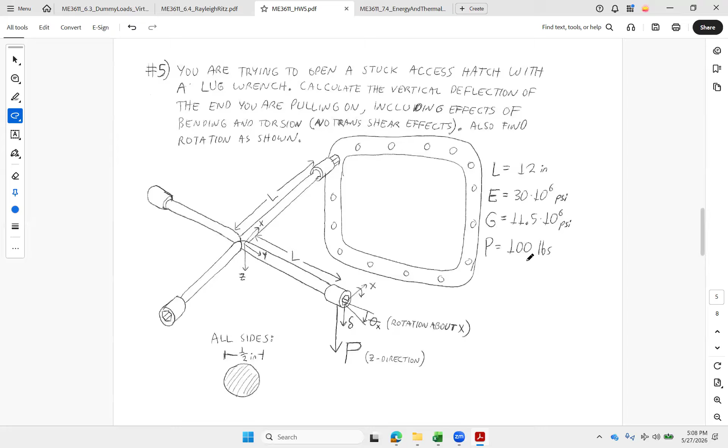But here we can see it's all going to be bending about this transverse axis, the M naught that we put on there plus the P. When we get over here, I've got a big bending moment on the end there, and I've also got my reaction that opposes this stuff out here.

When I hand that off to this beam, I'm going to have the vertical load still pulling down on it, but now what was a bending moment will be a torsion over here. So I get a chance to try that handoff. The torsion will be a constant as we go down there, so it's still just T squared L over 2GJ.

All right, so get going on those, give them a try.